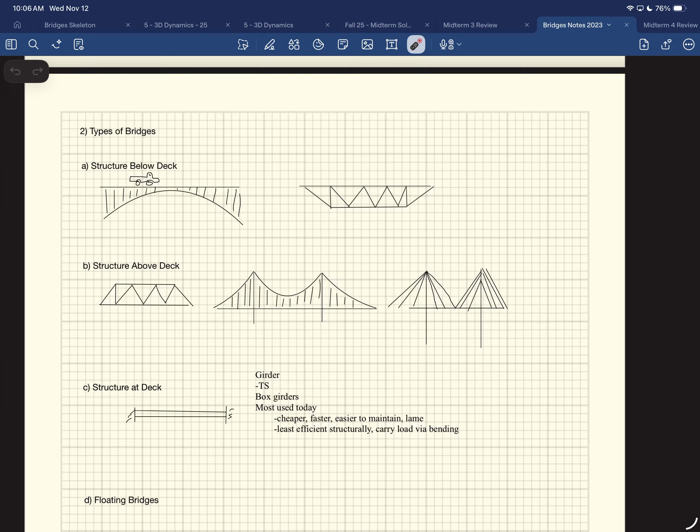It just collapses. Board comes down, takes out everything, the entire structure.

Connor pointed this out. Did you guys see this yesterday? This is in China. There was a landslide that took out that edge, that side of the bridge.

Yeah, I believe that would be the geotech's fault. They didn't look at the landslides coming off the mountain. But even then, I feel like that would have been something the geotechnical engineers should have been investigating and secured, did what it needed to do to prevent that from happening. Unless there was an earthquake or something that caused the landslide.

Does anybody know? Connor, did you listen? Maybe there was an earthquake that caused the landslide, or a shear failure of the slope, whatever that means. I've never taken a geotech class. My undergrad degree was in math.

Okay, so here we begin our second lecture on bridges. So we're gonna do that.

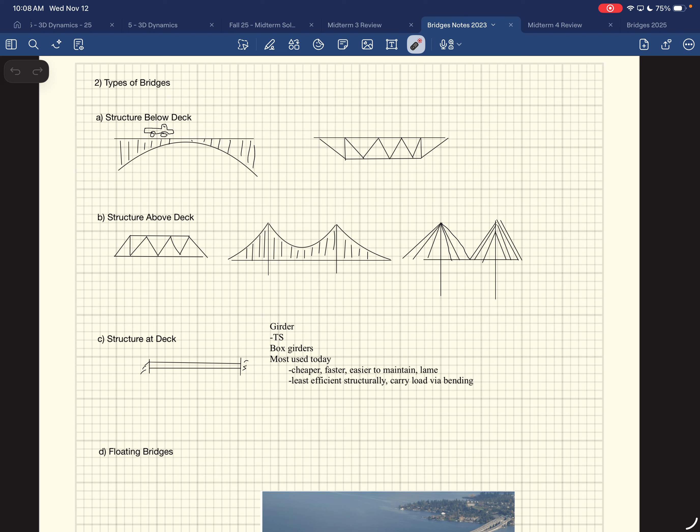All right, so we've got different types of bridges: structures below the deck, structures above the deck, and structures at the deck. These were already filled in for you.

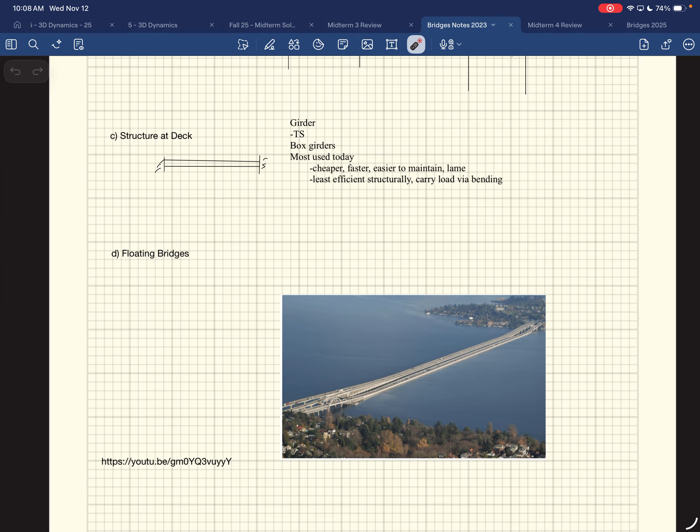Floating bridges, we looked at this. You really only find floating bridges in places where you don't have big tides. Near the University of Washington on Lake Washington in Seattle, they have the 520 bridge and I-90 crossing Lake Washington. Otherwise there's a big detour around them, so they have these floating bridges, and they're super deep, and that's why it works there. But you don't find them in places with tides, because there's a change of heights, and ships and things like that.

So what governs the type of bridge selection? These are my notes—were these filled in for you? No? Oh, let's just use my completed notes then, I don't have to write anything while you're going. Actually, there's very little writing anyway. I was looking through it, and we're just going to start looking at the code here shortly.

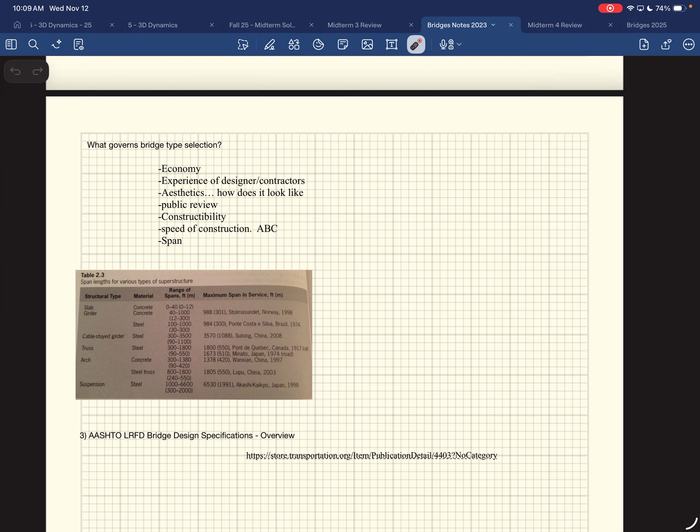So what governs it? Economy, right—what's going to be most expensive or not. The experience of the designer and contractors. Aesthetics—how does it look? We engineers, we're not that good at aesthetics, right? But the code does tell you to be mindful of aesthetics, and it tries to lay out what you need to do in terms of that.

An example of this is in Kalispell, or actually I think it's on the outskirts of Kalispell, in Bigfork. They had a big truss bridge there before that needed to be replaced, and by default they were just going to come in and put a girder bridge because it's very inexpensive, but also boring. So the community pitched in to get a fancier bridge out of it, and they got a big historic-looking truss bridge—even though it's brand new, they got it.

But it's for the aesthetics to meet the requirements. Sometimes aesthetics is simply like changing the color of the bridge. Have you ever seen when you're driving down in southern Utah, a lot of the overpasses use the red dirt type of coloring to kind of match in with everything.

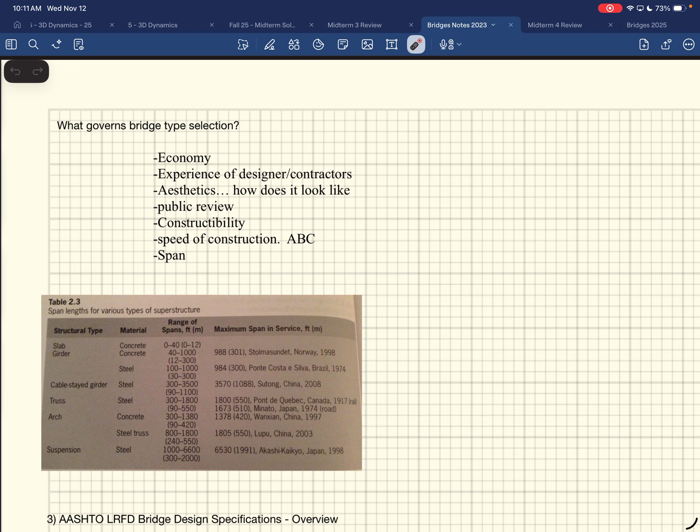So this is just from a bridge design textbook, and this came out of that. These are the different span ranges you might consider using for these things, and also the longest bridges. This one's crazy to me, right? 6,530 foot span - that's the clear span. Over a mile of a span.

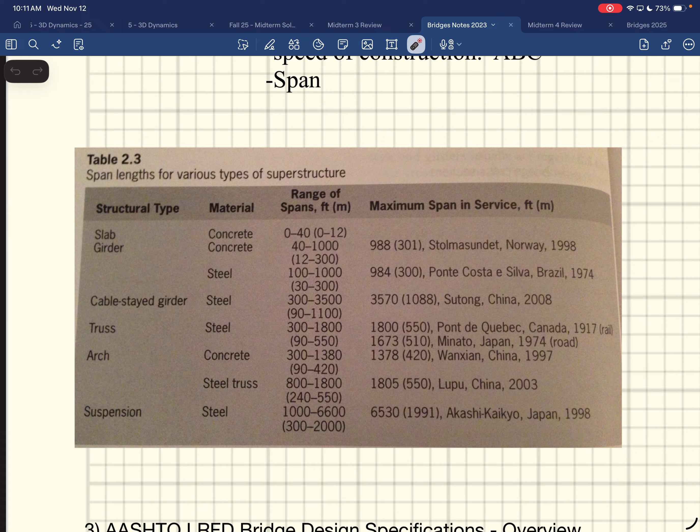That seems unnatural, right? That just seems like maybe we shouldn't be doing that. You should look up a picture of it. I agree, not right now. I'm staying on... I know, but it's a delay. Fine, Akashi, right?

Holy shit, god damn. We should go street view all the way across. I think that's a bridge, right? It is a giant bridge. As I said, I couldn't run across it. I would have to take several breaks as I tried to run on that.

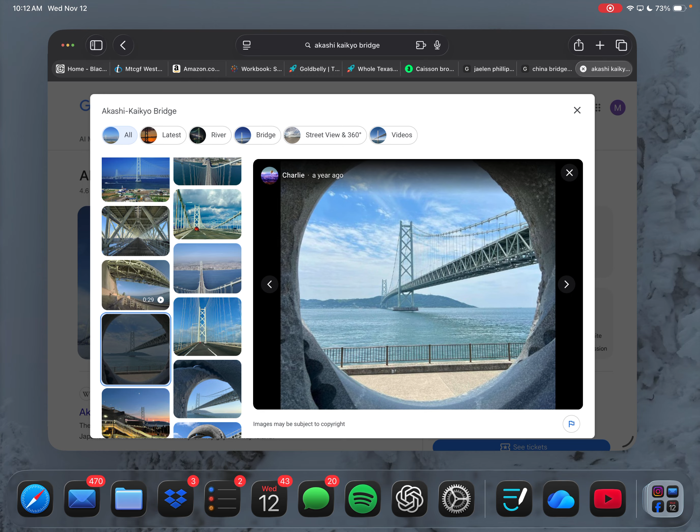Clear span - should look up the longest cable stayed bridge because they're cooler. Longest cable stayed bridge because they're cooler. I don't know, that's cool. Would they have to put like a slip joint in there, or something? Some people think they're ugly - that's a personal offense. Do they have to put a slip joint in there where the two cables come down in the middle?

Definitely asking the wrong person, Sean. Just because I'm teaching a class on bridges doesn't mean I know anything about them.

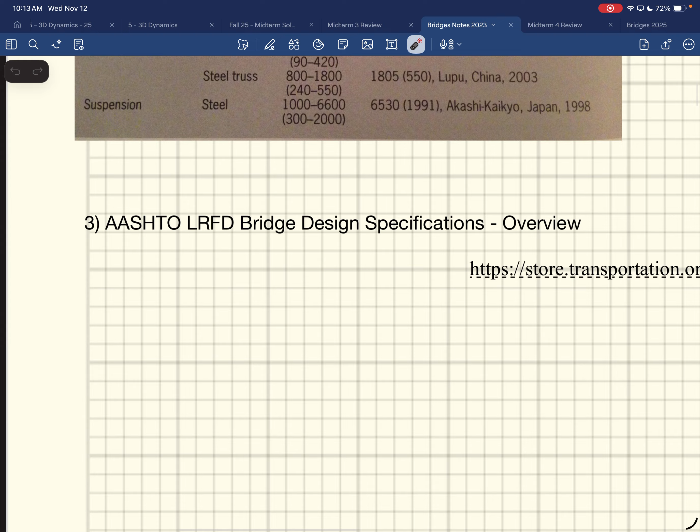I mean, really, what's going to do it? If you do go on, does anybody have interest in going to work at MDT? If you do, they're short like 25 positions right now in the bridge group in Helena. Whether that is something that is exciting to you or like, oh shit, I'm going to be way overworked - I don't know, it's something to consider.

I think it's a very steady job, very secure. I think you actually are not allowed to work overtime - by state law, you can't. So it's set at 40 hours a week. You have a nice retirement plan. It's Helena.

Yeah, so the old hometown there. Sometimes it's okay - like now, honestly, I wouldn't mind living in Helena. It's very calm and quiet. Like you want to go out to eat breakfast, you just go out to eat, you don't have to worry about big ass fucking lines. You get all the holidays off. It's a thing to consider.

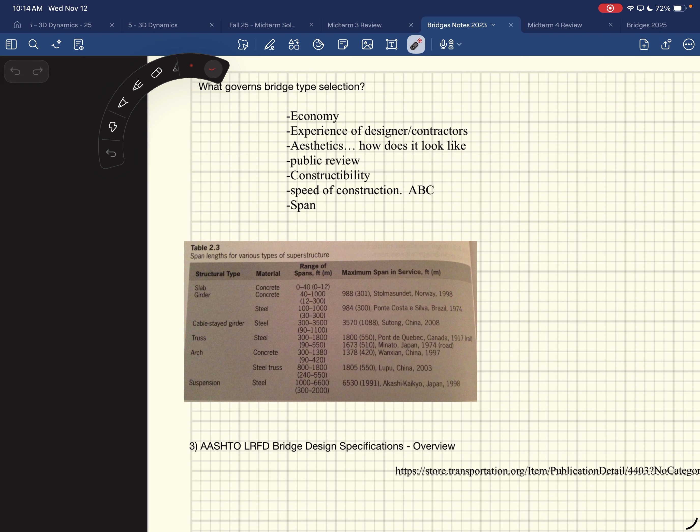If you're looking for a job and can't find one, think about that - I think there's some absolute benefits to it. But really, what's going to happen is wherever you work, they're going to teach you what they usually design, what they usually deal with. Some places, steel's way cheaper than concrete, so they do all their steel design for bridges. What we do mostly around here is concrete pre-stressed girders, and that's for most of the spans.

We have zero suspension bridges in Montana. There's a really cool bridge north of you even further, was it Medicine - it's on the outskirts of Glacier. There's a massive bridge there, a really tall one. That's probably one of our biggest bridges. Anyways, we don't have any of that. So it depends on where you're at, the economy, and stuff like that.

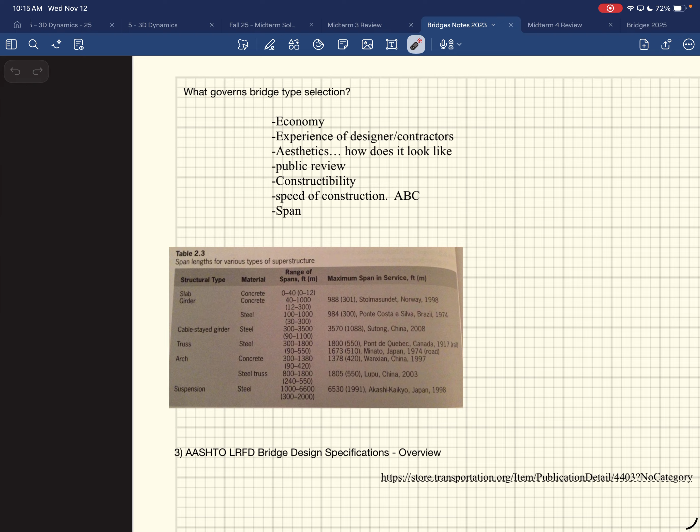So you'll do that, but this is just a general consideration as you move forward, just so you can look at those. So, AASHTO Bridge Design Specifications - overview.

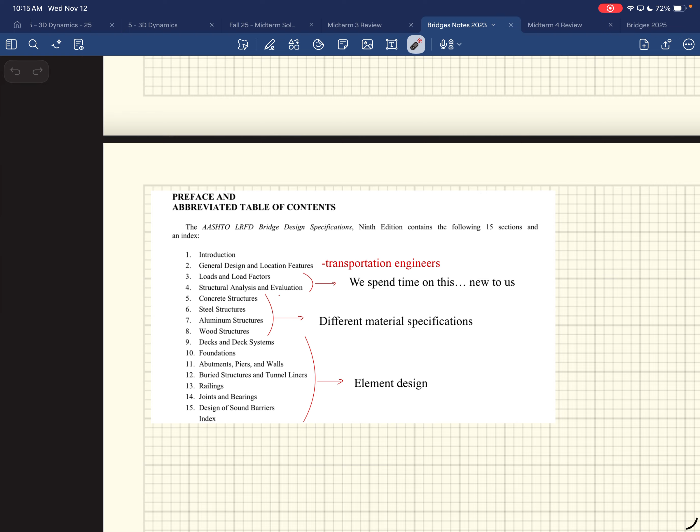So we're going to go, let me get back. Let me do the uncompleted notes so we can fill it in here. All right, so this is the preface?

Whatever you want to call it, it's the start, the beginning. This isn't... this is the table of contents to the table of contents. That's what it is, literally. I'm getting my notes, hold on.

Maybe I should have stuck with my completed notes. All right, so here's what the different chapters are: Introduction, general design and location features, loads and load factors.

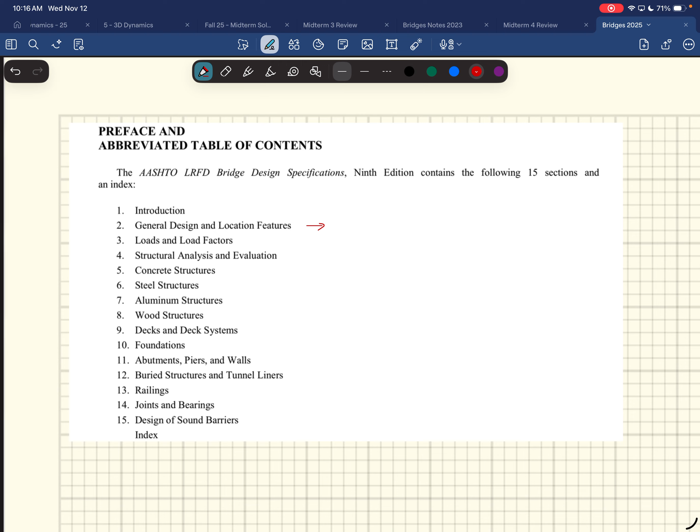This is kind of what you saw before. Like I said, this is a massive document, and one of the reasons it's so massive is that it includes all of the material specifications, ACI and AISC. It has all that stuff in there, but it also has rules for the transportation engineer as well. Some of the stuff won't even apply to us, like this general design and location features—that's not us. Transportation engineer deals with that.

One of these videos, I think it was one of those ones on floating bridges, they interview somebody and ask, what do you do? He says, I'm a transportation engineer, I do bridge designs. I'm just like, immediately, that's bullshit. The transportation engineer is not doing the designing of the bridges—the structural engineer that works with the transportation department is doing that.

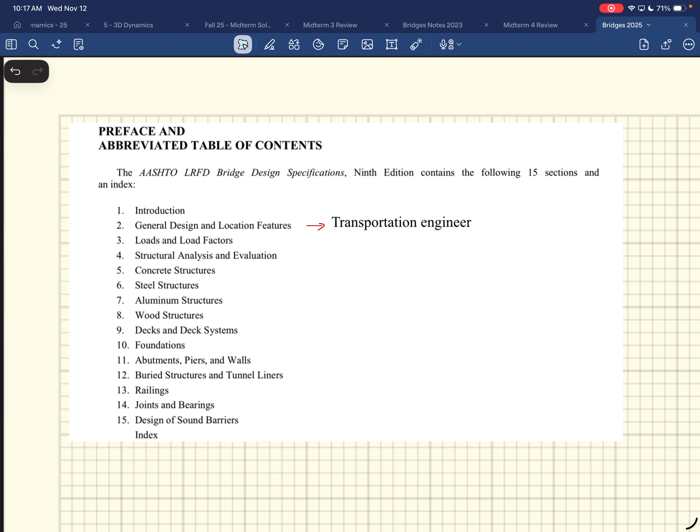The other thing with MDT is there's lots of mobility. You start out in the bridge group and work your way up to the different heads of the different regions. One of our former grad students is actually the chief bridge engineer, Andon Collison—he graduated around the time Tim graduated. You could also go lateral, over to different departments like geotech and water resources, just in case you get tired of doing that.

Okay, so this is where we're going to spend a lot of our time: loads and load factors.

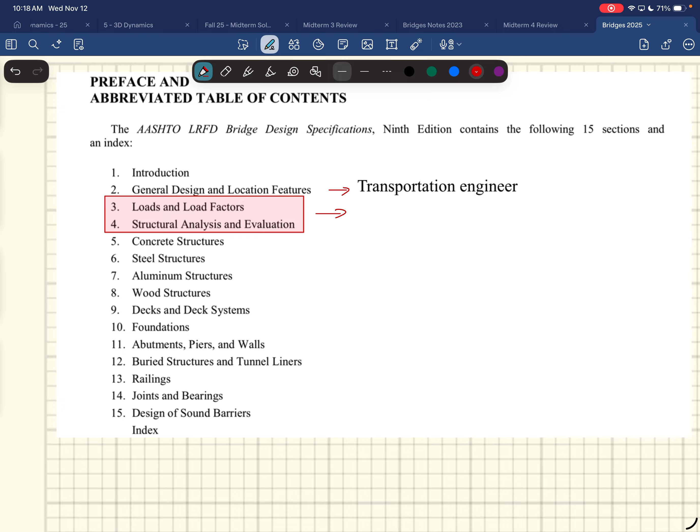This is what is new to us, right? You'll see, and I think I've said this before, what we focus on at MSU through all of our grad program is buildings. Even in a class on bridges, we're spending two weeks talking about bridges. What we've taught you about buildings can then be transferred over and applied to bridges—there's just some modifications to it. One of the big modifications is loads and load factors and the structural analysis evaluation. Those two things are different, but it's not that difficult.

I asked James, how did you make that transition? He said it was fine—it's just different, and once you get in that realm, you'll see they're very similar to each other. Most grad programs do the same thing, focusing on buildings with a little bit of bridges, though they probably have a couple classes on just bridges. UW, where I did my master's and PhD, had no bridge class at all, never even talked bridges. So at least we spent two weeks discussing it.

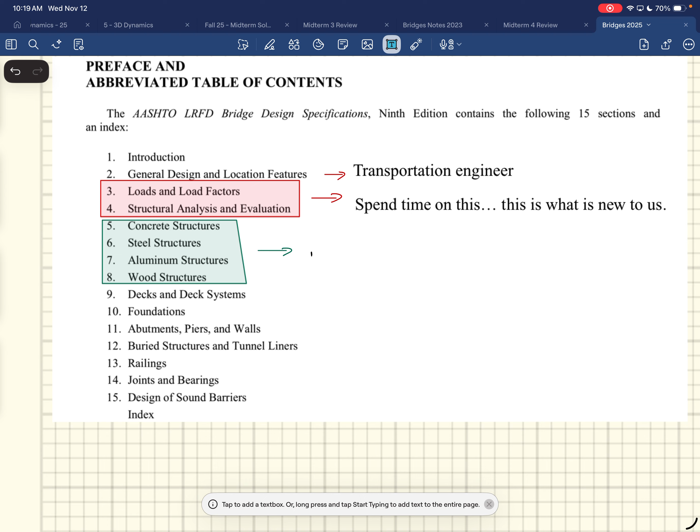These right here: concrete structures, steel structures, aluminum structures, and wood structures—these are the different material codes, material specifications, your AISC, your ACI, whatever aluminum is, and wood structures, your NDS. So you still use them. They refer to them—they're not going to make up their own steel sections, they're going to use the steel sections that are available, but the governing specifications change slightly, or sometimes they just adopt what AISC does, like with most of the concrete, it just adopts what ACI has going, but then they take that and put it in their own code. Those definitions are in there, so those are material specifications, we're not going to spend any time on that.

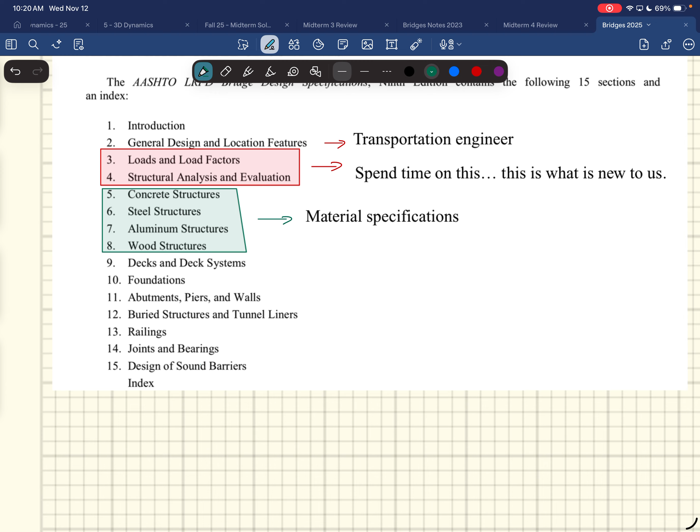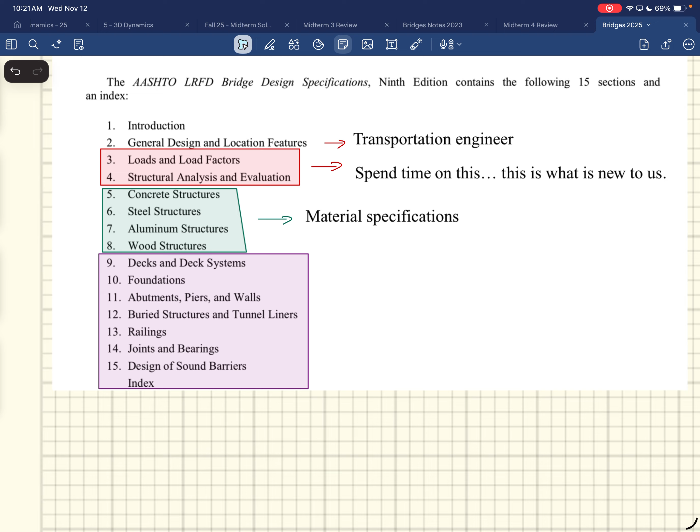And then we get into the rest of these things: decks, foundations, abutments, buried structures, railings, joints and bearings. These are all components. I might as well stick to my coloring changes.

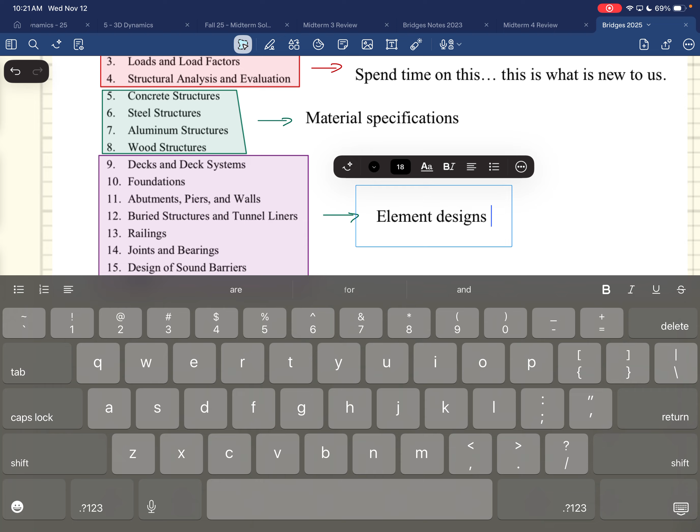We're missing Kira and Axel. Where's Kira? I'm gonna text her right now. Text her and say she died. I'm gonna text her too.

Are you dead? Are you dead? What if she did? Now that's just— Well, what if she responded? Oh my god, good point. Where be you? Maybe. See if she responds to either of us.

It says it delivered. Oh, she read it. Oh, she's got read receipts on. Not dead, don't do that. You shouldn't have read receipts on, right? Then you can't snub people.

Do you guys have read receipts on? For some people, or you could turn it on for certain people? My phone doesn't do that. I still don't want to do that. There's nobody I want to know I've read their text and I'm ignoring them, including my family. Especially my wife—she texts me, I read it, then I don't respond. Just knowing that I'm ignoring them.

Yeah, the plague. What? She's sick, is that what it is? Yeah, she said she also has the plague. Yeah, okay, alright, that's bad.

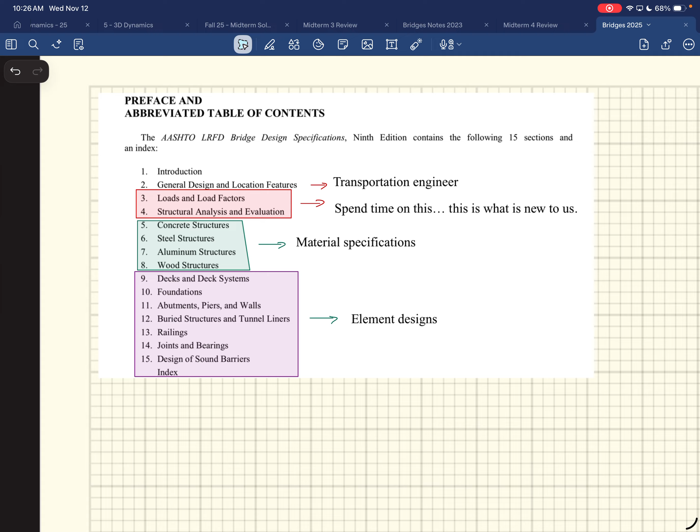Okay, so let's go through these things. Alright, this one I think everybody did fine. What is the equation for it, right? And then the first is... I will also say this was a hard test. It was very difficult, specifically designed to tease out did you know everything or did you not know everything. There were some tricky questions—we're going to get into that. I understand they were tricky, I understand they were hard, I understand they could have gone multiple ways, and that's fine, that was all part of it. I also gave lots of freebies, right?

Do you stretch the steel first before casting the concrete, right? That was supposed to be a freebie. There was another one that was there, like we're just guessing, right? That was another one. There was also 4 points of extra credit—matching of animals—which some people didn't do that great of matching animals. Neil, for God's sakes man, that's the first thing I wrote on my equation sheet. It's Billings, man—Billings don't know their animals.

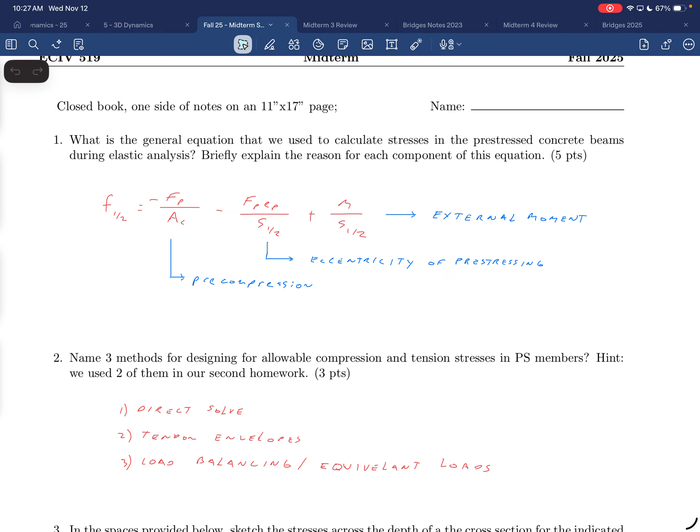I said you got some of them right. I gave partial credit on the extra credit. That's all right, you did get the camel right. That was your suggestion.

When you brought up camel, we should have known that maybe you didn't know your animals very well.

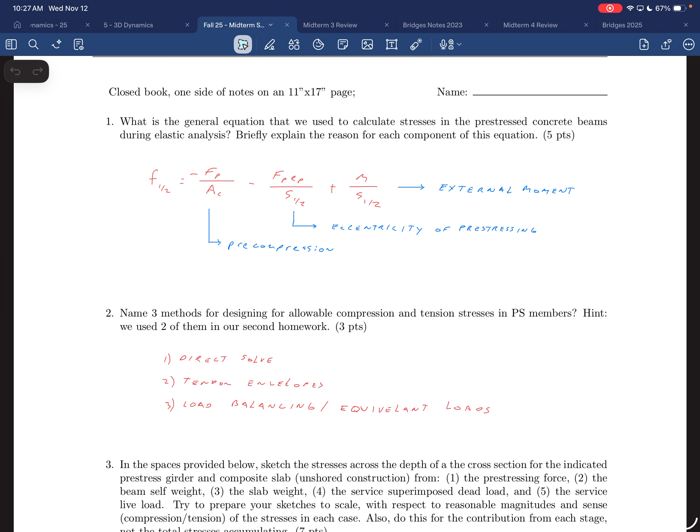We were talking about your fumble recovery earlier when you were here. That was sick. Yeah.

So that one everybody did fine. I understand there's room for arguing back on some of these things when we dive in, but these ones are straightforward: there was the direct solve method, tendon envelopes, load balancing, equivalent loads. This one specifically said designing for allowable compression and tension stresses. I think a couple people put in the methods for calculating ultimate moment capacity, but this one specifically said allowable compression and tension stresses.

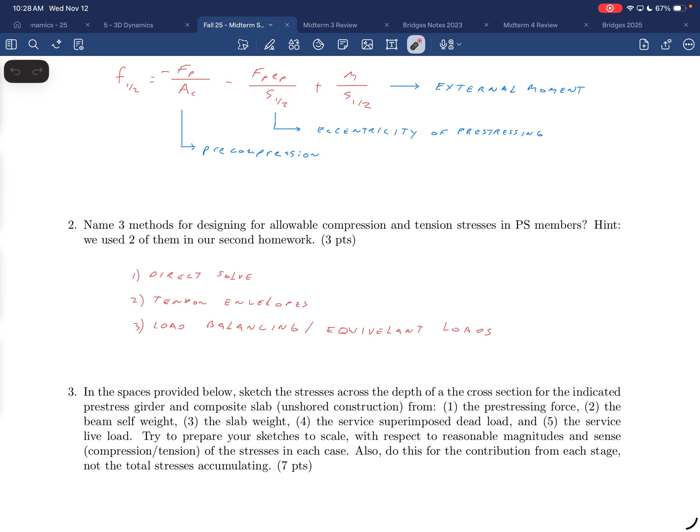So direct solve, tendon envelope, load balancing, equivalent loads, computers, stuff like that - that was very different. This one was all over the place, and it was literally trying to tease out whether you understand what each of these load cases are doing. That equation you used, that we checked all the stresses with, was a combination of all these things. But independently, what does each load case do?

So the first one was the pre-compression. One thing I left out was the steel at the bottom - I think everybody understood there was supposed to be pre-stressing steel at the bottom of this thing. So with it at the bottom, you would have pre-compression that looks like this.

Some of you sons of bitches drew compression on the left, and never in my life have I seen compression on the left, every time. I made sure to label it. Yeah, you did, you labeled it. I didn't dock you for it, I was just like, who the fuck does this? I wrote on there - every stress diagram you ever drew in mechanics of materials and statics looked like that, and compression was on the right.

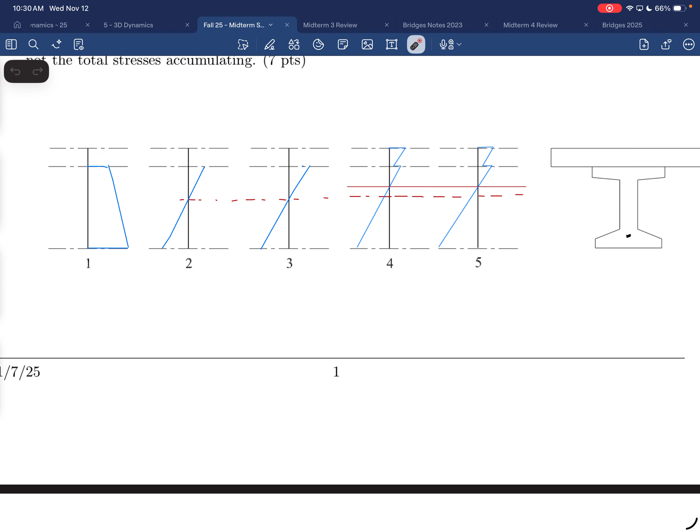Okay, they're right there. So in this one I had compression to the right and tension to the left, like a normal person. My compression would look like this because you'd have a component associated with the pre-compression, and then a moment component associated with popping it up, the eccentricity. So technically, if you really want to get into it, that's what it should look like. I accepted anything basically - since I didn't say where the steel was, you could have made it concentric and just had pre-compression like that.

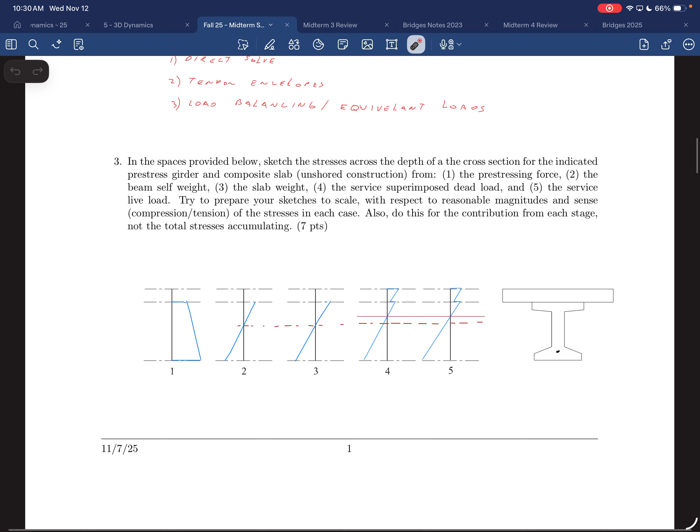Second one was the self-weight of the beam, is that right? The beam self-weight - in that case it's just the beam, and it's going to cause compression at the top and tension down at the bottom. So that one was fine, and again these are separate load cases - this is the pre-compression and then the self-weight. I didn't want you to add them on top of each other, because adding them would be a hybrid between this one and this one. So I'm just isolating that component, and I think most people, actually everybody, got that.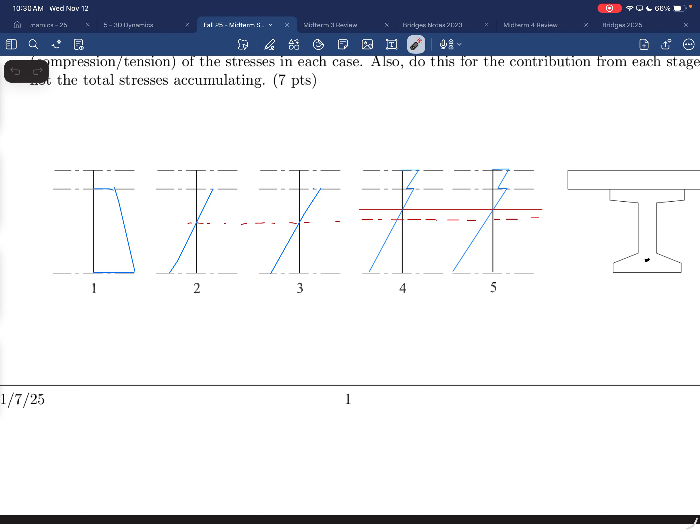Next one was number 3, the slab weight. So when you put the slab on it, the only thing that's engaged is the beam - the slab isn't even carrying its own weight. So there should be nothing up in the slab in this state, because at this point it's all bearing on that beam.

And then from there on out it becomes a composite section, and you have stresses that look like this. You're going to have less stress up at the top because this is a lower strength concrete than down here, and then you'll have this little kink where you're transitioning between the two materials. If you really want to get picky, which I was, I docked you if you put those neutral axes in the same places, because really they won't be.

Because the centroid will actually move up, right? It'll move up, and the bending will take place about that new centroid, right? That's where it's going to take place.

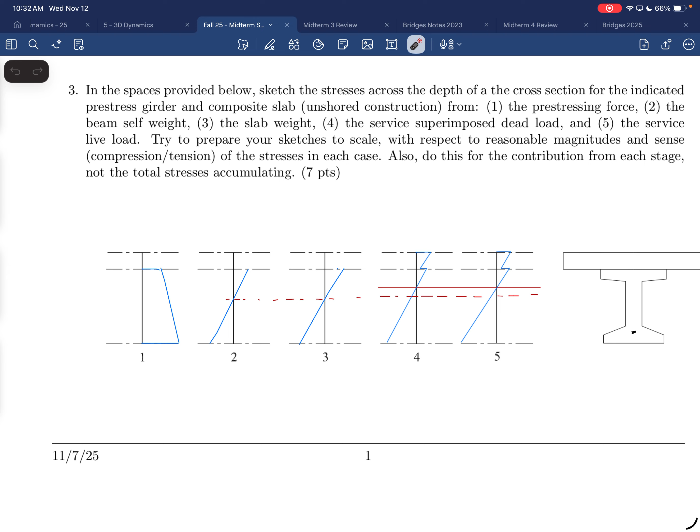So I was picky. I don't think anybody got all of it because I was picky on the moved neutral axis. That's all I was looking for, not all, but that really teased out whether you understood the sequencing that was happening, at least I thought, when you put a slab on top of it.

Now these are the ones where you can maybe argue some stuff back. This had to do with: are they completely true, are they completely false, and they might need an explanation. A, for example, right out of the gate, needs an explanation.

The ultimate moment capacity of a prestressed concrete beam varies along its length. True or false? It would be true if your e_p changes, if your prestressing location is changing along its length. We didn't talk about that, we didn't bring that up.

But when you did your design, you calculated the moment capacity of your beam in the middle, right? Really, your moment capacity changes along the length because the location of your prestressing changes along the length. So your moment arms are changing and your moment capacity is changing as you go along. Technically, when calculating your capacities, you'd have to check them at every location, because not only are your elastic stresses changing, so is your ultimate moment capacity. But if you had a constant e_p, then it doesn't change, and so that would be the false answer.

As the amount of prestressing in a beam is increased, the moment of inertia of the cross section increases, right? It actually does change, but we ignore it.

If you wrote false but gave some explanation—that's the other thing I did—if you put the right answer but the wrong reason, I docked you. I was checking whether you really got it or just guessed. These shouldn't really be called true/false, they should be short answers, but some of them were straight up true or false and didn't need an explanation.

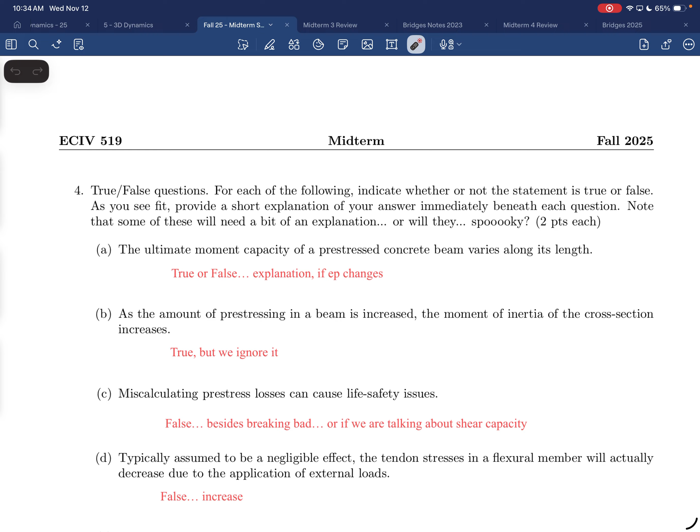I went through and read everybody's answers and teased out what was going on, and if you want to argue back on some of these, come at me, we can talk afterwards. So for the prestressing question, technically it does change—we showed it changing, but we ignore it. What I was looking for was something like 'true, but we do ignore it' or 'false because we ignore it,' something like that.

Miscalculating prestress losses can cause life safety issues, right? We talked about not really Breaking Bad, but if you're talking about shear capacity, maybe eventually if you're so far off. I think the statement was 'not really, but maybe,' I think that's what it was.

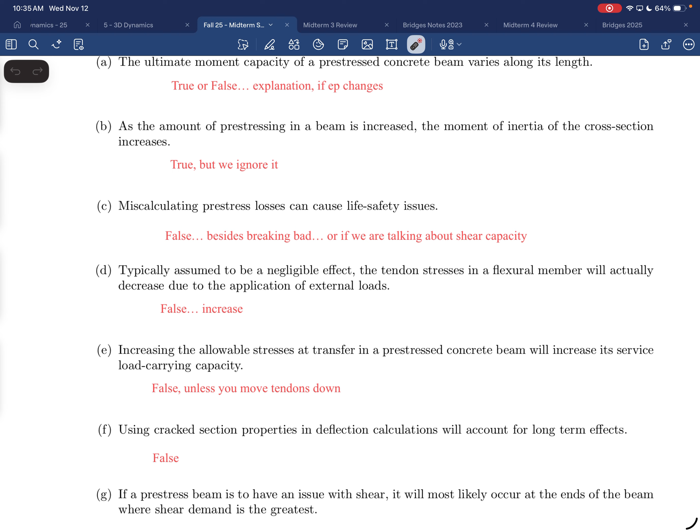Well, we can talk afterwards, Kyle. We'll talk afterwards. Because keep in mind, when I was grading these, I was also drinking, so they might not have been consistent. You want to be near the end of the pile when I'm grading, because I'm a happy drunk, not an angry drunk. My wife's an angry drunk. Myself, I just get whatever.

This is awesome, we're all doing concrete. This is great, okay.

But if you said 'true, because it affects shear capacity,' or remember Breaking Bad, like you lose your job because of your prestress losses and you got extra cracks, and so then you start selling crack, and then you're like, right...

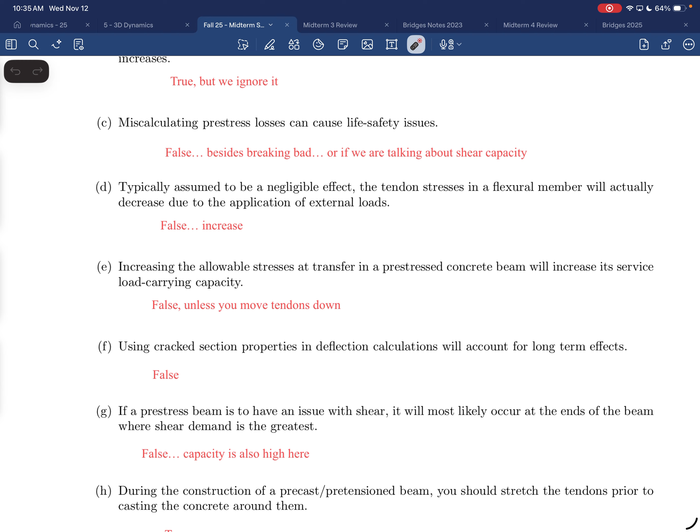How many of you somewhere upgraded your calculator from like an old one to a new one? Did you ever regret that, Thomas? Did you go to like a TI-89 and then, right? Anybody in here who all upgraded your calculator?

What? You downgraded your calculator, Tony? Yeah. You're the only person I've ever met that didn't like their TI calculator. Anyways, being able to solve integrals during an exam is fantastic.

And then using matrices, because I preach in dynamics - those I preach like get an 89, get an 89, get a 99. Directly tell everyone in the MLC that that's bullshit. It's not bullshit, you guys just don't know how to use it, that's the problem. They don't know how to use it. But if they take the time to learn how to use it, it's so much better. Many people say, oh, my calculator just can't do it, and I'm like, your calculator actually can, you're just saying that it's not as good.

What I've thought about doing in ECA is, well, I can't require people to get the TI-89 in dynamics, but I can at least show them how to do some of the stuff, just to show them that their calculators have the capacity to do like matrices and things like that, and actually show them in class. That would be good.

I think that a lot of people think there are calculators that aren't shitty calculators, like TI-84s and stuff. I think people think that they can't do anything with them, but they can. I feel like they think that you can only do stuff with the 89. Right, but they also suck, 84s. But they can do a lot more than people think. You're right, absolutely, and they never learned how to do it, and they're like, oh yeah, they can't do anything.

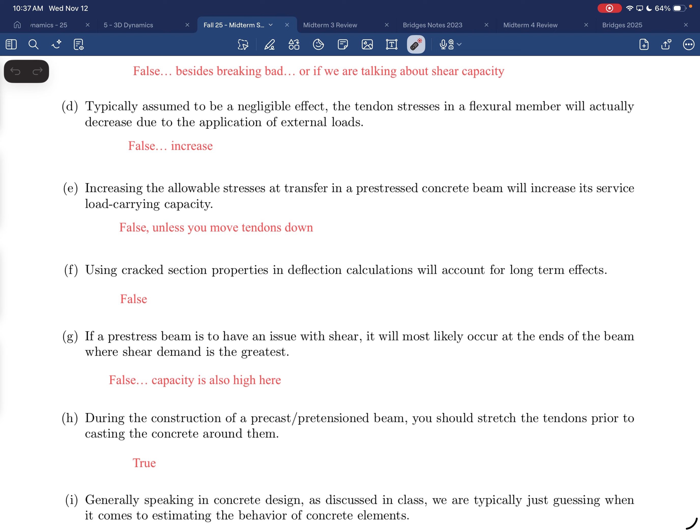In my undergrad, they taught us in the math class how to use those calculators and do all of those things that we talked about, which I thought was great. And then here, they don't even let you use calculators, which is stupid, right? It's so stupid. It's so stupid.

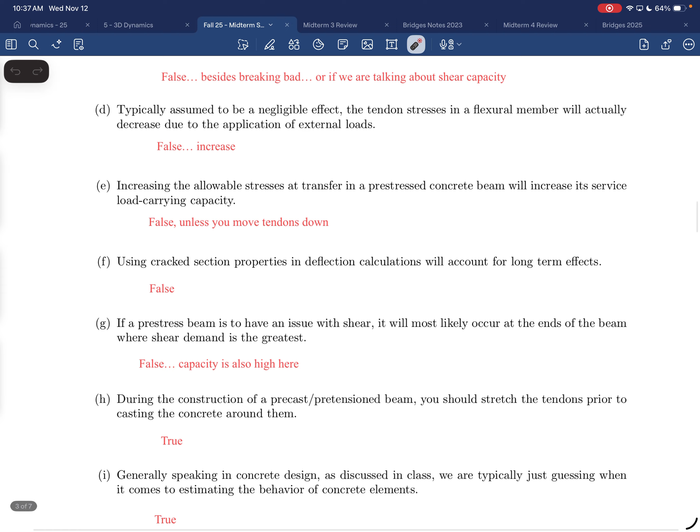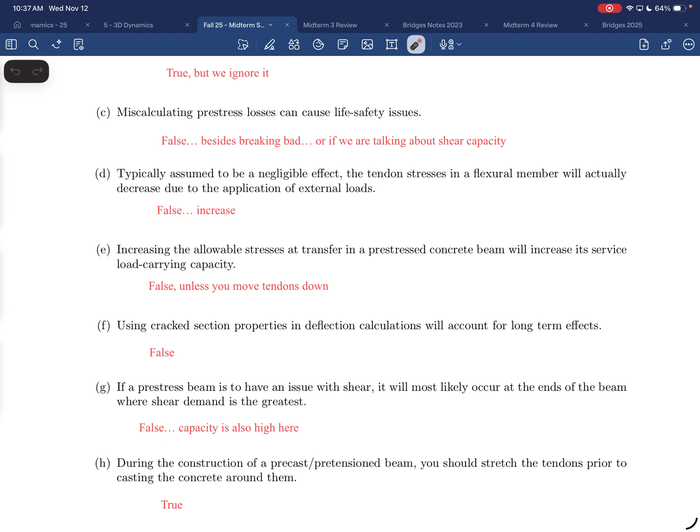Okay, then back to this. Typically assumed to be negligible effect, tendon stresses actually decrease - oh yeah, okay, so this is typically assumed. This one was actually straight true or straight false, right? And this one in case was false, because what I got you with was: typically assumed to be negligible effect, the tendon stress in flexure will actually increase, right? They increase, don't decrease, right? And so in that case, that one is just straight false. You're fine with putting straight false.

Okay, increasing the allowable stress at transfer in pre-stressed concrete beams will increase the service load carrying capacity, right? It actually doesn't do anything to your service load carrying capacity, but it does let you move the tendon, right? Because remember what's happening is you've got the envelopes to go and say you got to stay below this, another thing saying you got to stay above that. By increasing that allowable thing, it lets you move it down. So I accepted true there if you said, oh, it'll let me move my tendon down and therefore my capacity will go up, right? That was fine, okay.

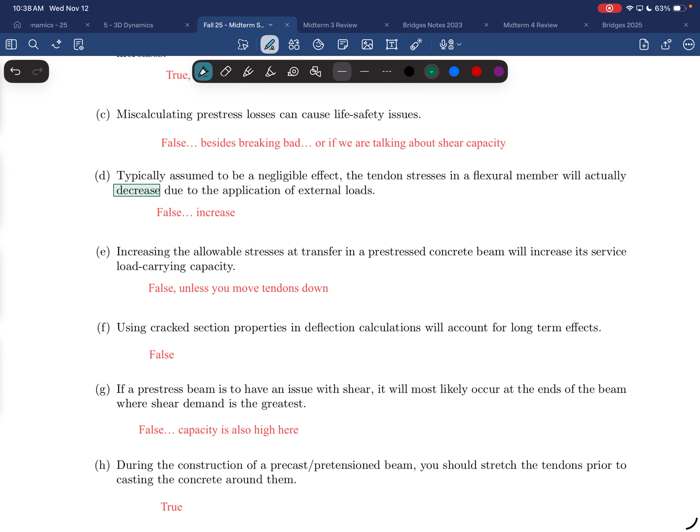And again, I know that some of these are kind of being nitpicky, but that was the point, was to kind of tease out of this, right? Using cracked section properties and deflection calculations will account for long-term effects - that's completely false, right? Those are two different things. One is cracked stuff happens immediately, right? Cracked section is just a completely different thing. The long-term effects are creep and shrinkage and things like that affecting your long-term deflection. So don't just do the cracking.

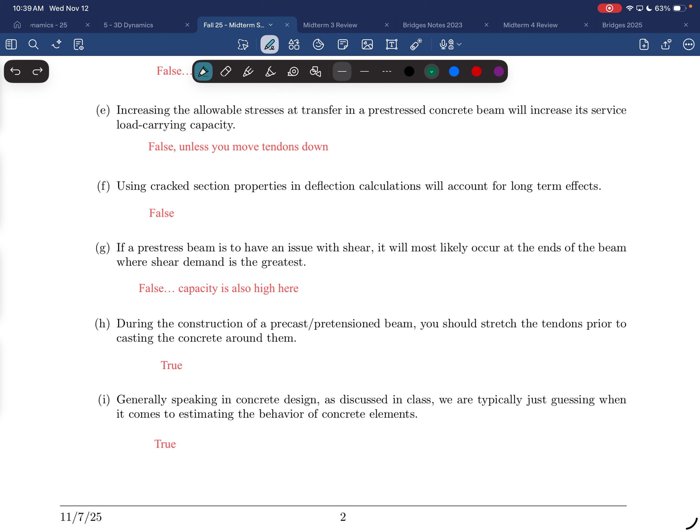Okay, and that actually, I got that question because I had a colleague of mine that did pre-stress design, and I said, how do you account for long-term deflections? He goes, oh, I turn on cracked section properties. And I was like, oh, fuck. Right? Like, that's not - those are completely separate, right? And anyways, so the dangers of just doing that stuff.

Okay, if a pre-stressed beam is to have an issue with shear, it'll most likely occur at the ends of the beam - no, because that's where your capacity is also higher, so that's false. It's somewhere in between. I think everybody got that one right.

During construction of precast pretensioned, remember, you should stretch the tendons prior to casting the concrete around them. Otherwise, you're getting some weird shit, right? If you cast the concrete and then stretch it afterwards, you're just going to get a bunch of tension cracks along the whole thing, right? So that was kind of a joke.

Okay, generally speaking, concrete design, discussing that, it's just all a guess. We're just guessing, we have no idea. It's an educated guess, but it is a guess, right?

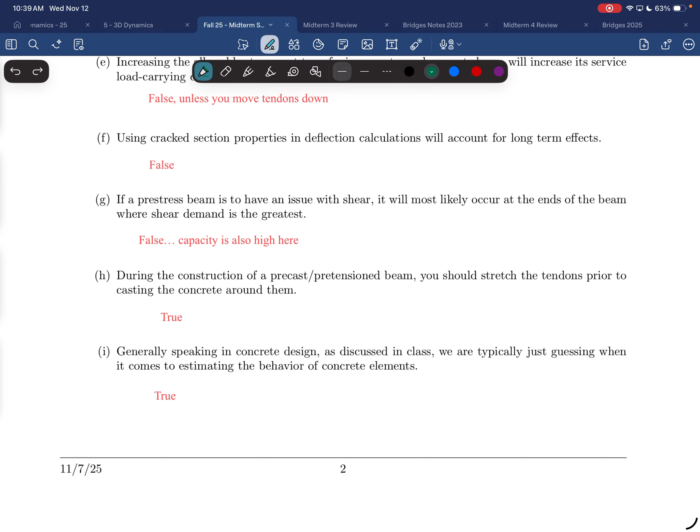Whereas steel is just, I agree with Tim. There's some cool things about steel, but it's just because he likes it so much because he doesn't have the mental capacity to deal with concrete and how complicated it is, okay?

So this one, the debonding on the ends, right? The reason for debonding on the end has to do with the fact that you have less external moment, less self-weight moment near the ends, so you don't have anything to counter the pop-up. This is what's pushing it down, this goes to zero, this is my pop-up. The eccentricity from the pre-stressing causes it to pop up, and so we debond it near the ends so that this doesn't exceed this and we get tension failures. By debonding it, we save from cracks happening at the top at this location.

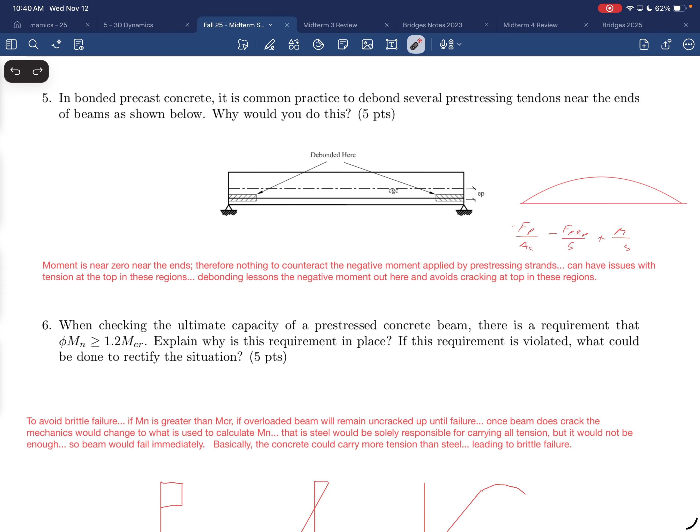So in order to get the full credit here, you had to say something about your moments, your external moments being near zero near the ends. You can't just say, oh, to prevent cracks. It's like, well, why does it happen there and not anywhere else? The reason it happens near the ends is because of this.

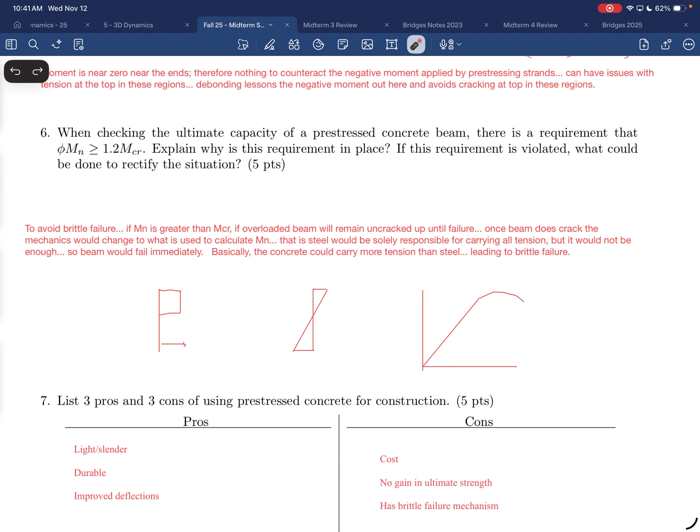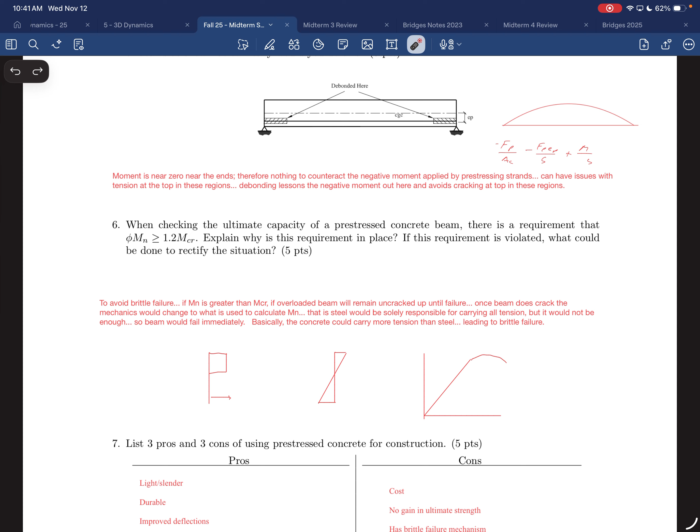Why would you do this? Well, yeah, you could almost say prevent cracking for almost everything pre-stress related.

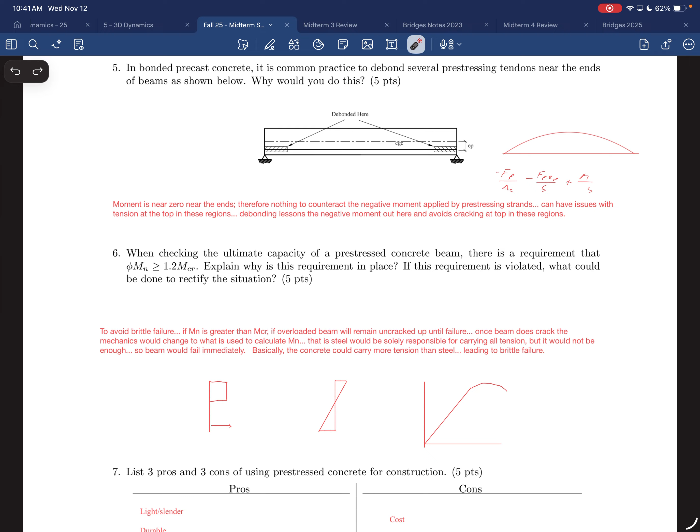But anyways, okay, all right, this one, right? Again, this is one that you had. Absolutely, to prevent a brittle failure. Right? That's if you said that, to prevent a brittle failure, and then to fix it you add in tension reinforcement, not pre-stressing. Because if you add pre-stressing, then it increases your moment capacity and it increases your cracking capacity. But if you just put in regular steel, it only affects the other one.

That being said, in order to get the full credit, which no one did, which just proved to myself that nobody understood what was happening, I wanted a little explanation of why it avoids the brittle failure. And it has to do with, everything looks great, beautiful, everything's great, and then if you overload it, a crack forms. As soon as that crack forms, the mechanics switch from this to this. And if this capacity isn't big enough, then it just comes crumbling to the ground immediately.

I wanted something like that. I wanted something, do you get why? Like, I understand the brittle, great. I think I just took one point off if you didn't say something about the mechanics switching from this to this, and if we don't have enough steel in here in this capacity, and this capacity is less than this capacity, then you get a brittle failure.

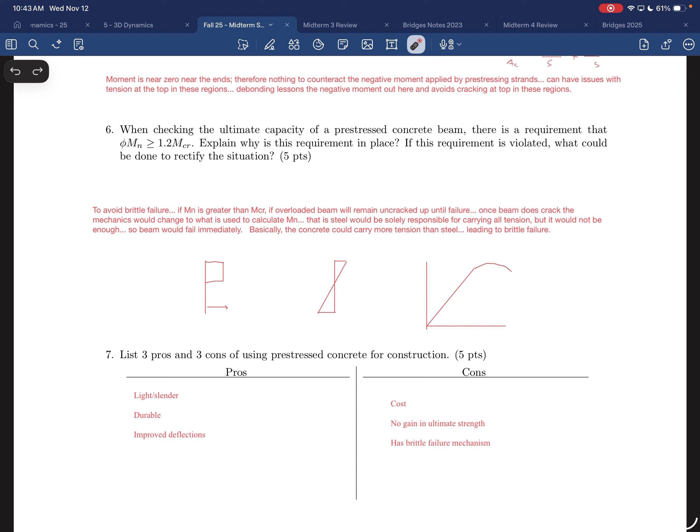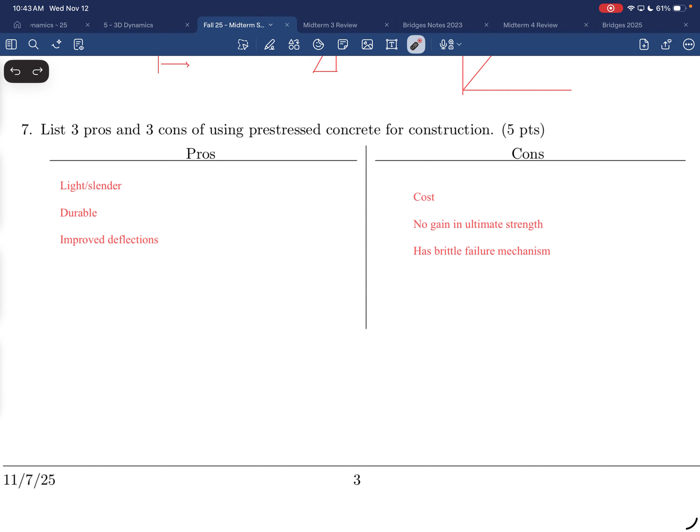Pros and cons, I think everybody got this one fine. Light, slender, durable, improved deflections, cost, no gain in ultimate strength, has brittle failure mechanisms, things like that. I think everybody got that one right.

Oh man, this is... whoa. This is another one that I wanted, and I think like 3 of you got this one, at least close, right? So what this had to do with, and I think it's a fair question because we did one like this and had the diagrams that showed it, right? And the problem is this is statically indeterminate.

Statically indeterminate. So you have a primary moment, a secondary moment or hyperstatic moment, and then a combination between the two, okay? So the way we did this in class is you remove one of those constraints, right? One of those constraints would be this.

Because this thing wants to curl up. It wants to curl up because the eccentricity, my pre-stressing strand, is at the top, right? And so it wants to curl, and it's causing a constant moment. That constant moment is FP times EP. That's that constant moment because the EP is constant along the whole length, and then you have FP times that, so FP times EP.

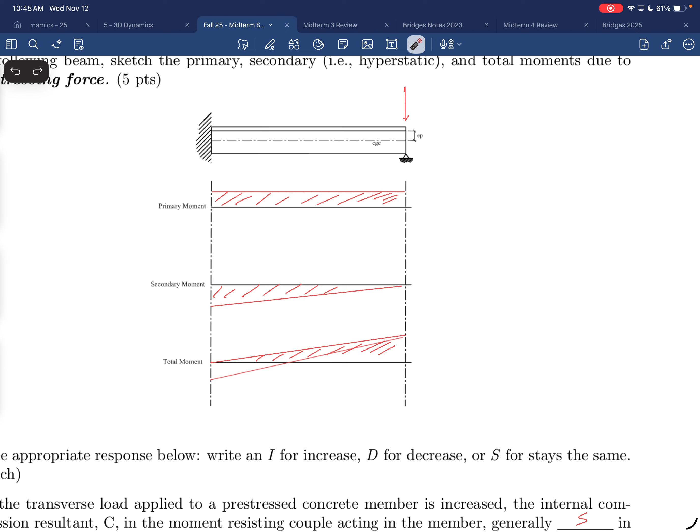And so that is causing a positive moment. The reason it's a positive moment is because you're getting squishing at the top and pull apart at the bottom, tension on the bottom. So that's a positive moment. So what your primary moment is, it's coming from your pre-stressing strand. It's a constant moment along the entire length, okay?

To think about the secondary moment, this sucker wants to curl up. So what I do is remove this thing right here, and then it can't curl up because there's a downward force there. So then you analyze this as a cantilever with a point load coming down, because there is going to be a reaction there. Because the thing wants to curl up, there's going to be a reaction that pushes it back down. And then that would be the moment diagram from just a point load over on the end.

Right, because that's the secondary moment. That's because it can't pop up, so there has to be a reaction over there, and that causes that moment right there. It starts out as a negative moment because we're pushing down, and we're getting compression in the bottom and tension up at the top. And so then the combination of the two, it actually turns out that it's here. It's zero on the end, and the moment over here, like I said.

That being said, if you didn't know that this was equal to this, you wouldn't know that. So any kind of line like that with these two added together, maybe not known magnitudes, I accepted that. Definitely not something like this. Definitely not - some people got like these, that's just random, right? That's it, that's all it is.

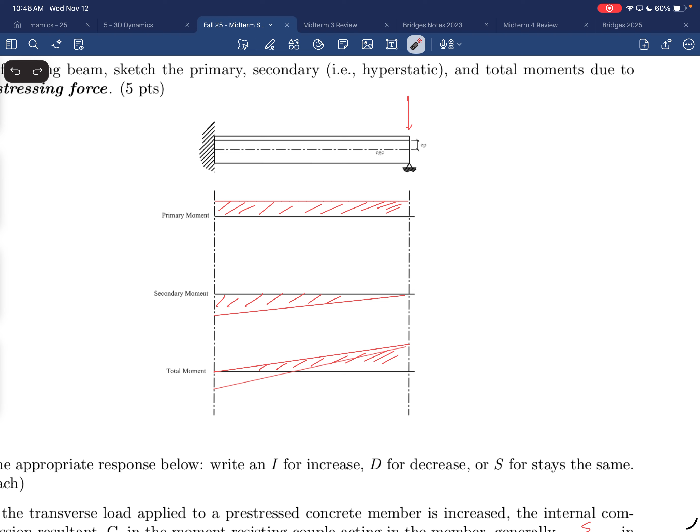And again, I do think this one was fair. I did show you this one. We did an example like this. We talked about how to pop it up and then get back down. That being said, it was fine, and I think if you drew lines, I think I gave points. I think that's what you said - maybe not if your lines were all completely wrong. I don't remember what I did there, but come in and talk to me if you want to.

This was a journey, this one. This was a journey. Okay, this one I think really did tease out some stuff. As a transverse - again, you put an increase, decrease, or stays the same.

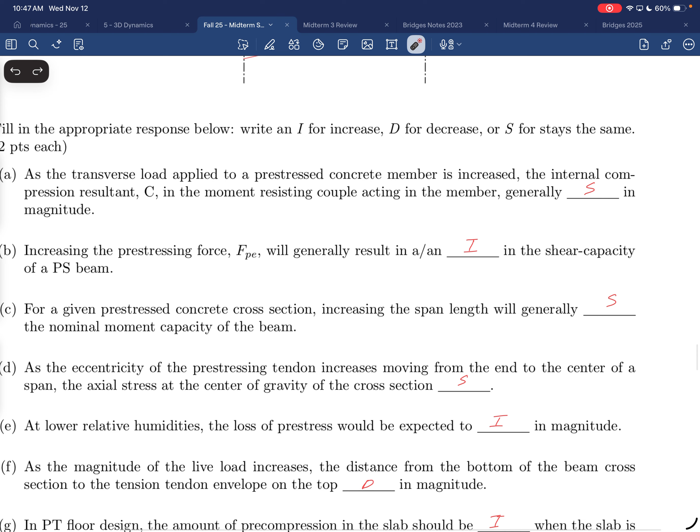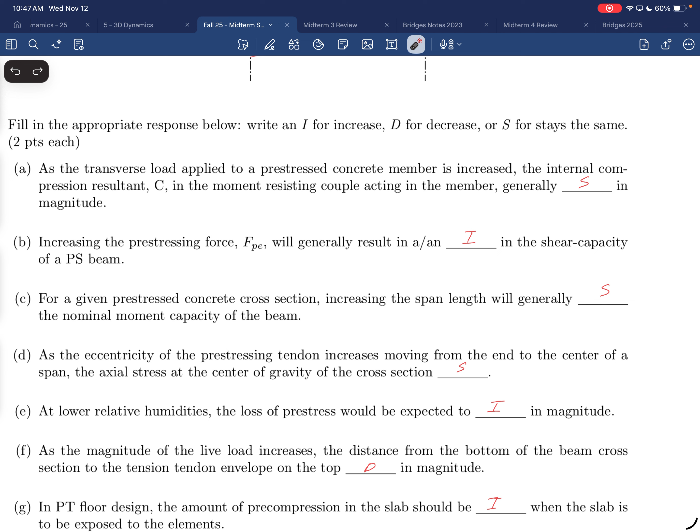As the transverse load applied to a pre-stressed concrete member is increased, the internal compression resultant C in the moment-resisting couple acting in the member stays the same. We had a comparison between reinforced concrete and pre-stressed concrete: in pre-stressed concrete, C and T stay the same, but their moment arms change. In regular reinforced concrete, C and T get bigger and smaller - that's what I was referring to. The C would stay the same in pre-stressed concrete because it's coming mostly from the big pre-compression force that's there no matter how much load is applied to it.

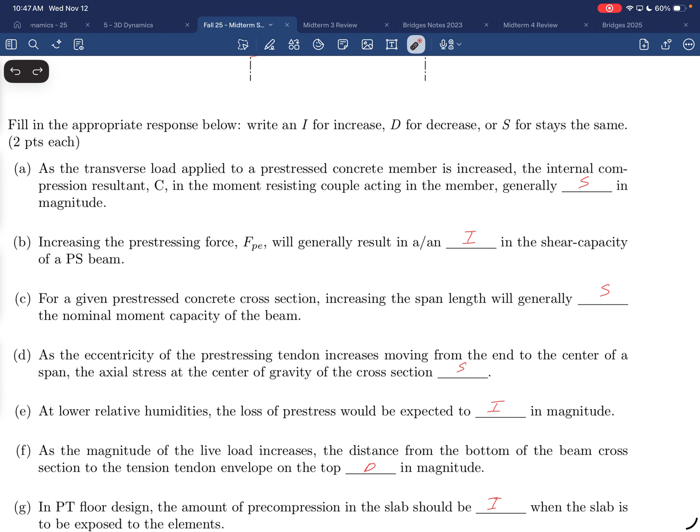Increasing the pre-stressing force, FPE, will generally result in an increase in the shear capacity - that was your Mohr's circle arguments and stuff like that, so it increases the shear capacity. For a given pre-stressed cross-section, increasing the span length will do nothing to the nominal moment capacity. One's on the demand side, one's on the capacity side - that's why that one stays the same. The span length has to do with demand; capacity is independent of the demand. And so that one stays the same.

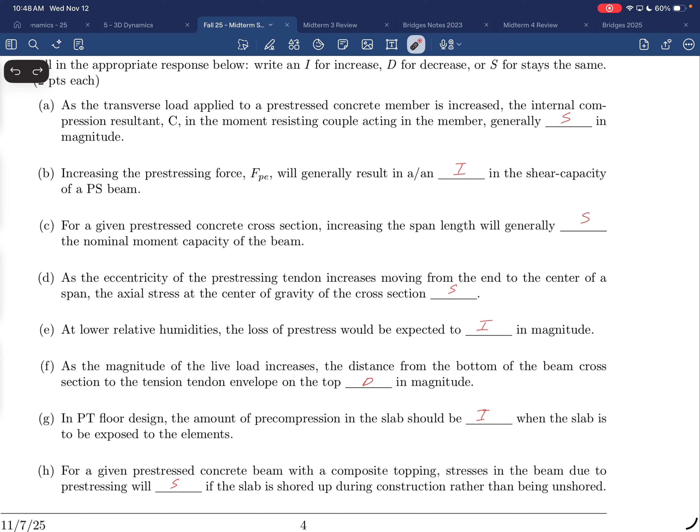As the eccentricity of the pre-stressing tendon increases, moving from the end to the center span, the axial stress at the center of gravity of the cross-section stays the same. Because all of those stresses go back to that original stress equation, it's all M over S, F_pe e over S. All that bending is taking place about the CGC, so any moment you apply to it is taking place about the CGC, so that doesn't change it at all.

The only thing affecting the centroid is P over A. So no matter where you're at along the whole length, P over A is what your stress is in the middle. That's why that one stays the same. All right, that was that one.

At lower relative humidities, the loss of pre-stressing would be expected to increase. This one was like, at lower relative humidities you'll get more losses, which means your loss of pre-stressing will increase. Some people got hung up on whether you get more losses versus your stresses after the losses decreasing, but anyways, that was the increase.

This one right here, this one's a tough one. As the magnitude of live load increases, the distance from the bottom of the beam cross-section to the tension tendon envelope on the top would what in magnitude?

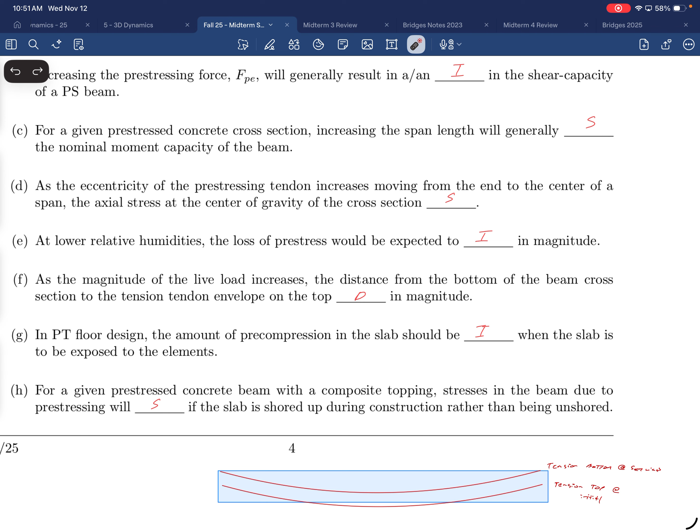Yeah. Then I'll give you credit for it, okay? Because next time I do this, I'm going to say 'the line on the top, motherfuckers,' and then do this. Draw the diagram, and point at the line you're talking about - the envelope. What does this line do? I like it because you really have to dig in deep. You really do. There's so much involved with that one question.

In a PT floor design, the amount of pre-compression of the slab should be increased. Kyle said that in passing in one of his lectures - he was saying that like when you're doing a garage, for instance, you increase your pre-compression force because you're going to have more exposure to the elements. You want to keep the cracks even tighter and stuff like that. So that was an increase.

For a given pre-stressed concrete beam with composite topping, stresses in the beam due to pre-stressing will stay the same if the slab is shored, because the pre-stressing is independent of any other loads that are happening. You just put the pre-stressing on immediately and then that's locked in. It has nothing to do with what you put on top of it or anything else like that.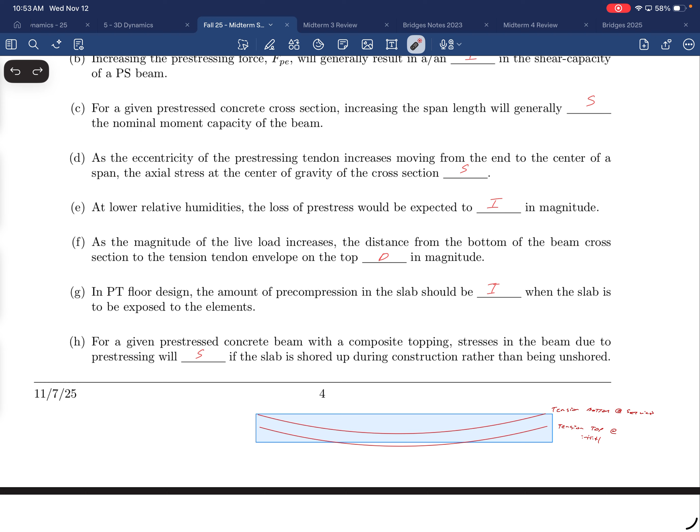That was a trick. So you're saying you pre-stress it and then that force doesn't change? No, I thought you were talking about the design pre-stressing, not the beam due to pre-stressing itself. Oh, if you dug in deep, yeah, that's what I thought you were talking about. Like, once you're accepting it, if you're not just copying him, all right, I'll accept that too. If you were thinking you'd change the design and increase the thing, fair enough, I'll give you that one. I'm fair, I'm benevolent, okay.

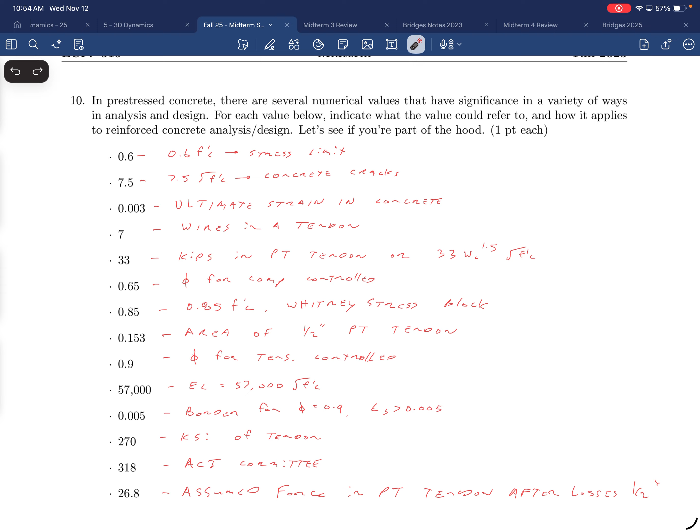So 0.65 is the phi for compression controlled sections for flexure. 0.85 is your Whitney stress block, or it's beta 1 -- I accepted either one of those. 0.153 is the area of a 1/2-inch PT tendon. 0.9 is your phi factor for tension controlled members. 57,000 is used for calculating the elastic modulus. 0.005 is the strain in the steel that governs whether or not you're at the border of this 0.9, otherwise it's the transition. So once you hit 0.005, your phi factor is 0.9, okay. 270 is 270 KSI steel. 318 is the committee -- this is 318-19, I think, the current code we use.

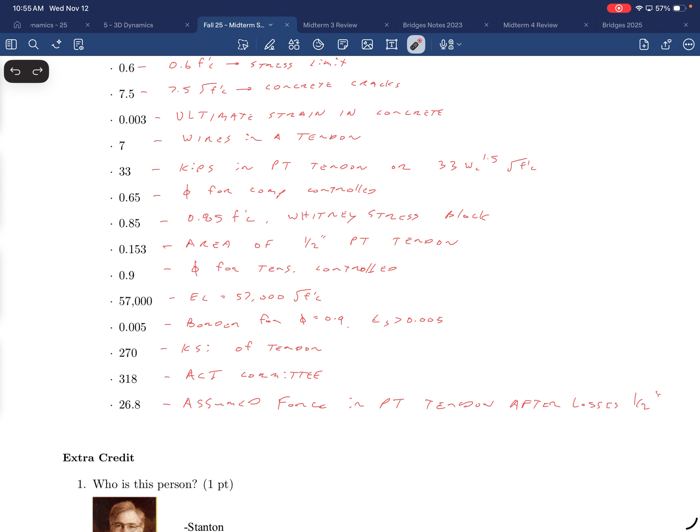26.8 is the assumed force in the PT tendon after losses. It's your F effective or P effective, depending on which variable you're using. So you start out with 33, but then when you actually design, it's 26.8.

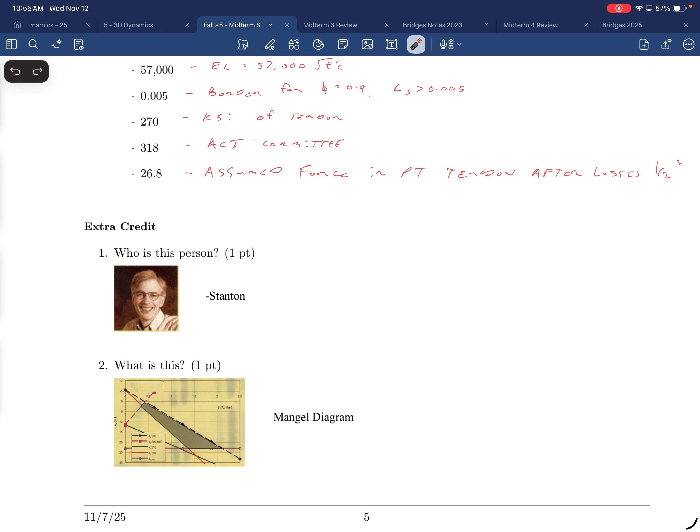Okay, this is Stanton, right? That's in one of his notes, where the picture of himself was -- there was a journal article on sign convention that had a picture of him. That's a Mangel diagram, right? We don't use those things anymore.

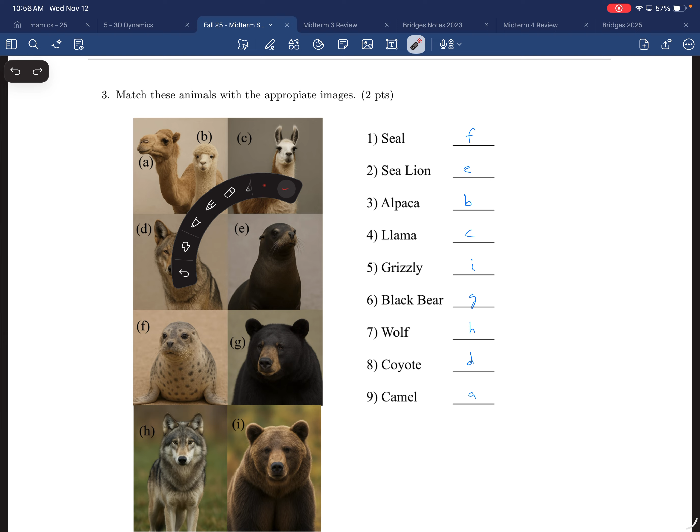And then this is a seal, this is a sea lion, this is an alpaca, this is a llama, this is a black bear, this is a grizzly bear, that's a wolf, that's a coyote. This is the seal versus -- when I saw him, ChatGPT, I had to do this. It did all these for me, right? It did a pretty good job. I think it exaggerated the differences between them, but I thought this was a journey -- it was quite the journey to get Chat to do this. I was convinced you were going to do something similar. Or like a Brad -- oh, I should have done that, yeah, I should have done that. So Neil, this is a llama, this is an alpaca, this is a camel, this is a sea lion, this is a seal, this is a coyote, this is a black bear because it's black, this is a grizzly bear because it's...

There was a couple, you weren't alone, Neil. The coyote looks smaller than the wolf in that. Yeah, but look at the face, the pointy ears, the narrow face. That's not a Montana wolf, Mike. No, it's not. Coloring, okay, Sean. John's not throwing shit at you, Neil. Not throwing shit, yeah.

But now I look at him, and clearly there's a difference. Like, who would ever mistake this and this? For God's sake, besides Neil, right? They are completely different, right? Like, this I could club, this I couldn't club, right? Don't they do that, right? Like club baby seals, that a thing, right? That's what? Yeah, no, you're right. I do, right? That's a thing. That's a thing, right? That we did. Like, we went out and clubbed a bunch of baby seals and then made coats out of them.

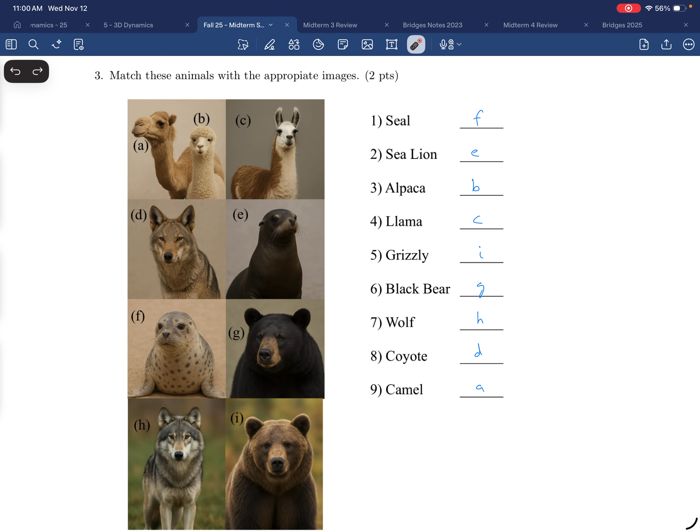Okay, okay, I'll look at that too. Yeah, you think that's gonna be fine? I think it'll be fine. Okay, yep, I think it'll be fine.